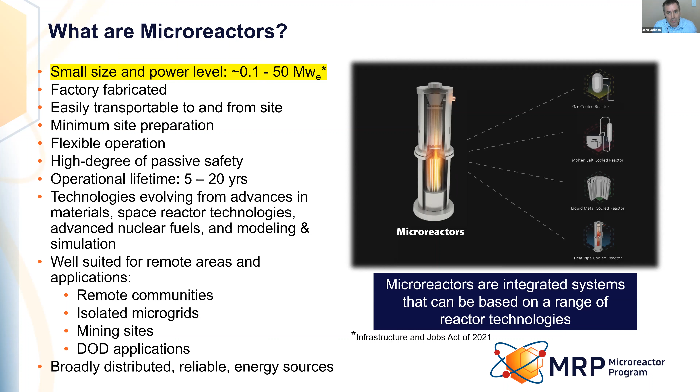So why are microreactors becoming popular? Technologies have advanced quite a bit in terms of materials science, space reactor technologies, advanced nuclear fuels, and modeling and simulation. And it's very widely recognized - there are many studies going on in terms of suitability for remote areas and applications, at least for the first to say tenth of a kind microreactor that gets commercially deployed. So initial target areas are remote communities, isolated microgrids, mining applications, and DoD applications.

So what about the program? The Office of Nuclear Energy's Microreactor Program is a congressionally funded national program. It sits in the Advanced Reactor Development portfolio, along with high temperature gas reactors, fast reactors, and molten salt reactors.

The vision is that through cross-cutting research and development and technology demonstration support, the program will achieve technological breakthroughs for key features of microreactors, and empower initial demonstration of the next advanced reactor in the United States, which many would argue is the Marvel microreactor, which I'll get into in a little bit.

The Marvel microreactor is a very small microreactor being developed by the Microreactor Program, and enables successful demonstration of multiple domestic commercial microreactors.

So the vision is supported by fairly obvious objectives: address critical cross-cutting R&D needs that require the incredible unique capability that exists within the DOE complex, and engineering universities such as University of Wisconsin, where incredible expertise and infrastructure exists as well.

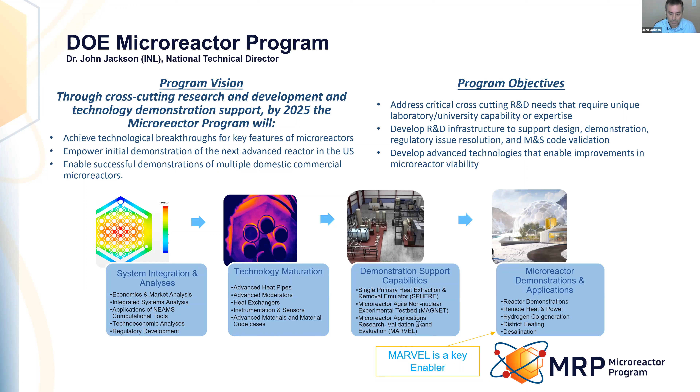So just an example of some recent economic analysis work done by the System Integration and Analysis Technical Focus Area. This is a summary of 3 reports: one by University of Wisconsin that I mentioned earlier, another by University of Alaska Anchorage on siting microreactors in Alaska, which is an extremely popular idea, and then a Microreactor Program supported study by the Nuclear Alternatives Project for feasibility of siting microreactors in Puerto Rico.

This is a 147-page report. I recognize I didn't add the link to the report, but if you search for global market analysis, microreactor market analysis on the OSTI webpage, you'll find it.

We're doing this to understand economic performance and market analysis, to provide a basis for support to industrial microreactor deployment and operation by understanding the market and the drivers.

I don't want to spend a lot of time on this, but one of the things they looked at were deployment indicators cross-referenced with use cases across the top of this table.

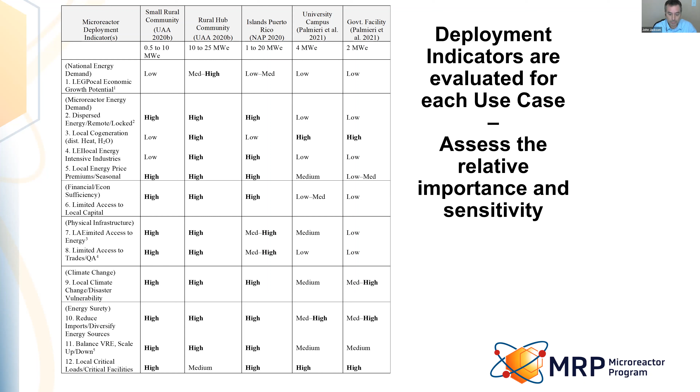The report goes further to suggest microreactor technical requirements to meet indicators requirements. An example is number 2 here, dispersed energy, remote, locked. The technical requirement generally has to do with transportability and self-containment, small EPZ, for example, long life core, and this is typically measured by transportability via an ISO container.

The report goes further to suggest, drawing from the dozen or so domestic microreactor concepts under consideration right now, which ones might match this technical requirement.

This is a slide put together by Holly Trellue, our technical focus area lead for the technology maturation focus area. The intent of this is not really to highlight heat pipe microreactor, but rather as a generalized reactor display, to point out the materials and systems we're interested in primarily from the Microreactor program standpoint.

We haven't spent a ton of time on fuel, except to qualify legacy metallic data for EBR2, for instance. We rely on other programmatic efforts, such as the TRISO program, for a lot of this work.

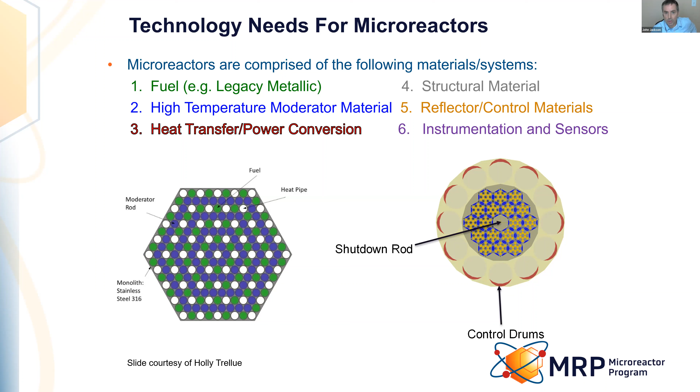By the way, I should toss out a disclaimer. There's some technical detail in these slides. I am not the technical expert in these areas, so I'll do my best to answer any questions you have, but may refer you to technical focus area leads.

In terms of understanding and quantifying effects of yttrium hydride, it is of interest because it generally retains hydrogen at temperatures approaching 800 Celsius, which makes it an ideal candidate for several of the microreactor concepts to drive down the size of the core. So we've set about providing characterization data for yttrium hydride.

For example, in fiscal year 21, Los Alamos at the NCERC facility performed a criticality experiment to understand a slight positive reactivity coefficient as a function of temperature, to provide this data to designers so they can design with this in mind. We've also performed an advanced test reactor irradiation to a single fluence, 2 times 10 to the 21 neutrons per square centimeter, at 3 different temperatures.

John, was there a question that popped up?

Yeah, if you open the chat channel, Ben Rendering is asking: MARVEL is filled with UZRH, which is well qualified up to 650 C or so, and was used in the SNAP program, which is similar to MARVEL, instead of qualifying zirconium hydride and YH moderated and TRISO fuel. So his question is: is UZRH a credible fuel option for commercial microreactors that could reduce some of its qualification burdens?

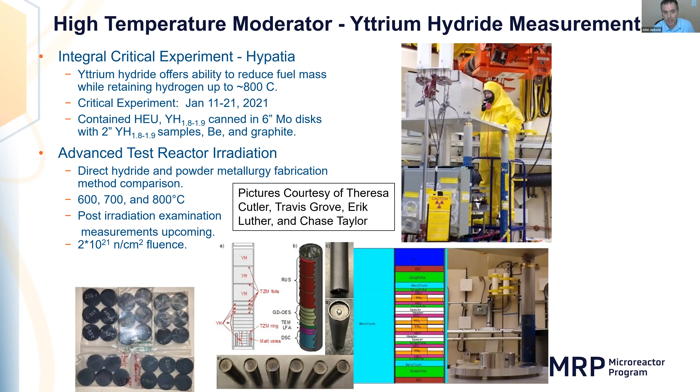So the ATR experiment included 2 different fabrication techniques for yttrium hydride: a direct hydriding technique, as well as a powder metallurgy fabrication technique developed at Los Alamos National Laboratory. Fiscal year 22 will be focused on the post-irradiation examination, including understanding hydrogen migration at 600, 700, and 800 Celsius.

As I mentioned, we're focused on test article development for integration in the magnet facility and sphere facilities. We started with a 7-hole heat pipe test article, attempted advanced additive manufacturing techniques, but couldn't quite get the tolerances we wanted. So we're building a 37-hole, 37 heat pipe test article that you see in the image on the bottom middle, by building blocks and diffusion bonding them together.

The idea behind this test article is to understand interaction of heat pipes, for example, cascading failures, and so on and so forth. The single heat pipe test article is surrounded by cartridge heaters, seen in the upper middle or upper left image, and these allow characterization of heat pipes.

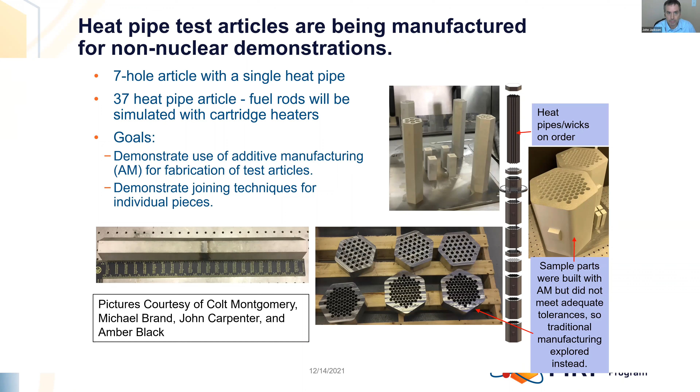Just a few more words about the 37 heat pipe test article. It is under construction right now. The diffusion bonding has begun. It'll have 37 heat pipes installed in it. They still need to have wicks added and filled with sodium. It'll be combined with a heat transfer capability and installed in the magnet facility for testing. It'll include instrumentation and sensors, heavily sensored, and will interface with perhaps power conversion units so we can understand the interface.

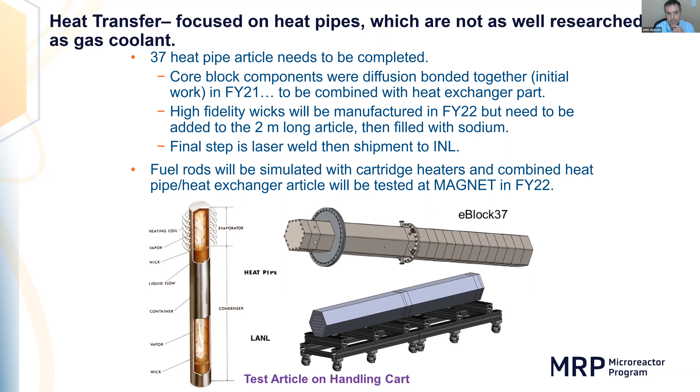So just a few characteristics of the Sphere facility: a single primary heat extraction and removal emulator. It's a single effects test capability built to enable gas flow, for example, for helium component testing. It provides up to 20 kilowatts of power and has a maximum operating temperature of 750 Celsius. This facility came online in 2021, and we performed initial startup and operation, and are completing the engineering design of a gap conductance test article to address an issue the NRC has identified. We're also working with an industrial partner to understand the effects of orientation on heat pipe performance. The Sphere facility is very good for understanding and isolating single effects, for example, transient behavior of heat pipes.

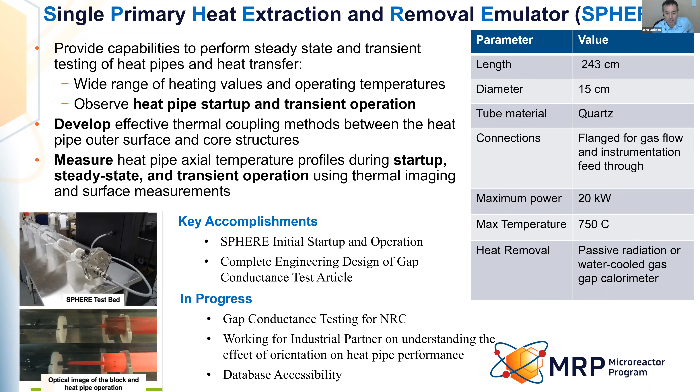Similarly, the Microreactor Agile Non-Nuclear Experimental Test Bed is a non-nuclear microreactor surrogate, if you will. There's a large test space, 5 foot by 5 foot by 10 foot, enabling full-size component testing. It can integrate with a power conversion unit. It enables verification and validation. It enables air or inert gas, with a design pressure of 22 bar and maximum power of 250 kilowatts and 750 Celsius temperature. This is a useful facility for verification and validation of full-size components, integral effects tests, power conversion connection, and so on and so forth.

June, have there been any other questions that have popped up? Yes, we have two questions. One is from Erica Tierman. He's asking what type of wick you are using in the heat pipe.

I'd have to verify that with Holly Trellue, I apologize. Another question is from Mark Anderson, I think it's similar: do you know what type of wicks are being considered for the heat pipe? So who is the contact that could give this information? Holly Trellue, our technical focus area lead, her contact information is in the last slide, would be a great person to ask. Okay, thank you. Sure, oh, so another, apologize.

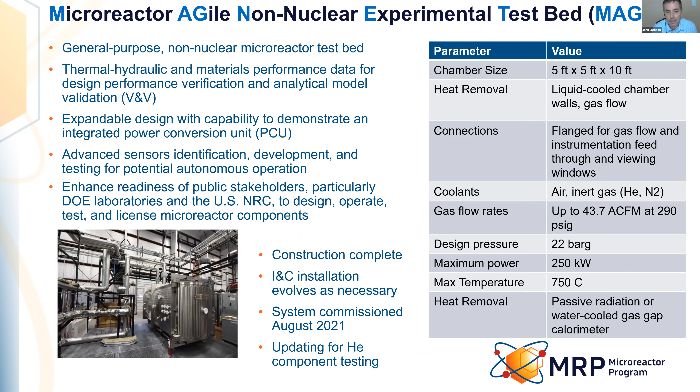Okay, thank you, and we have a fourth question. Sorry for that, yeah, go ahead. Daniel asked about Republicans and Democrats being equally interested in making nuclear generated energy usage, nuclear as a priority.

Yeah, so that's a policy question. I'll point to the bipartisan infrastructure bill as a great sign that people are headed in the right direction. Among other things, the bipartisan infrastructure bill authorizes full funding for the advanced reactor demonstration projects, which, if you're not familiar, are a Natrium sodium fast reactor slated to be installed in Wyoming by 2027, and an XE-100 X-energy concept slated to be installed in Richland, Washington. So those are fully funded, and the bipartisan infrastructure bill has quite a bit of content in it, and nuclear is mentioned some 76 times in there.

Okay, thank you. So we do have in our possession a Brayton cycle Capstone C30 turbine alternator compressor unit that we're going to integrate in the magnet facility if we get appropriate funding this year. This will enable power conversion unit testing and interface with heat exchangers.

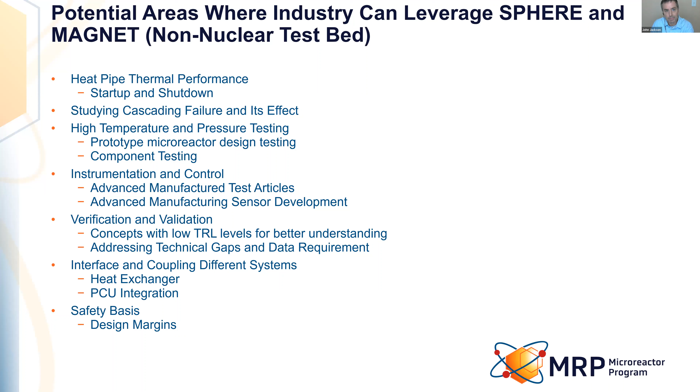Now, some of this is not coming to fruition because we're under continuing resolution. Getting back to the previous question about people getting along with each other, unfortunately we're stuck in continuing resolution for the time being.

So before I get into the Marvel microreactor, are there any other questions? No, we don't. Maybe we can hold questions to the end of the presentation. Sure.

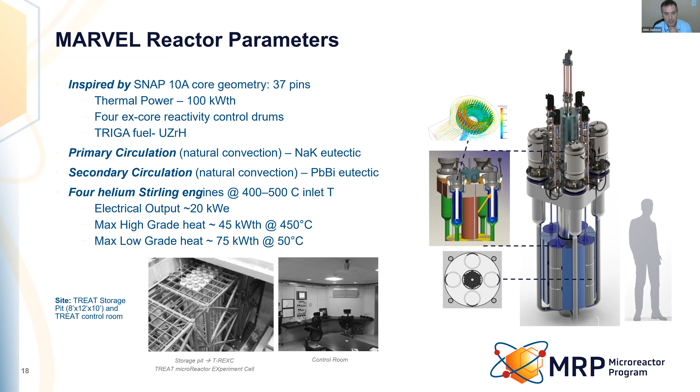The Marvel microreactor is slated to be installed in the Transient Reactor Test facility, in a pit in the floor. It'll operate synergistically with TREAT, in that while TREAT is off, Marvel is on, so it's not expected to affect TREAT operations.

In terms of value from our perspective, many of the targeted communities are new to nuclear, the targeted microreactor entry market. Marvel will help us to answer questions associated with operational complexity.

It'll allow us to take real data to address fears of co-location, and help us understand training needs and reliability of a microreactor. The bottom line is it's a major barrier to market entry that we don't have anything besides a paper reactor right now in terms of microreactor technology, because people are reluctant to adopt a technology unless they can see it in operation. So Marvel will be the first to achieve criticality and power end-user applications, enabling us to answer some of these questions.

From a developer perspective, we have spoken with several developers. There are technology interests such as the uranium zirconium hydride fuel implementation, and the reactivity control system is very popular, as is our process to address NEPA requirements, fuel loading processes, and the power conversion system. I've got a quote here in the middle of this slide.

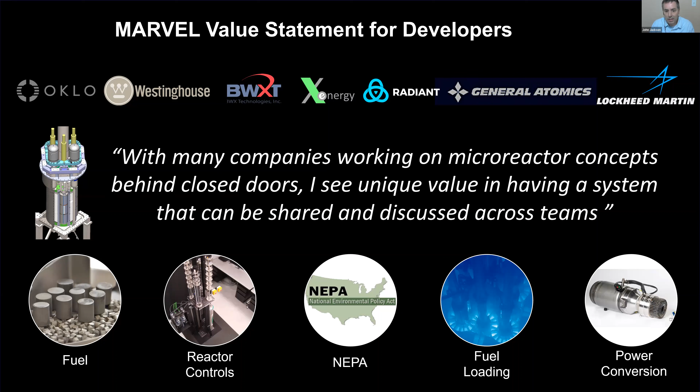With respect to DOE, it's important to remember a little bit of history, that the US government enabled the light water reactor commercial sector, not the other way around. There were 52 reactors demonstrated at INL in the 25-year period between 1950 and 75, which helped pave the pathway for Navy nuclear and commercial water-based reactors. No new advanced reactors have been built since the Department of Energy was formed in 1977.

So MARVEL is a DOE reactor, and it has an opportunity to be the first in several ways: the first to create a new market, the first since the formation of DOE, and the first to connect to a nuclear microgrid in the world. This is no doubt about reestablishing US leadership in nuclear.

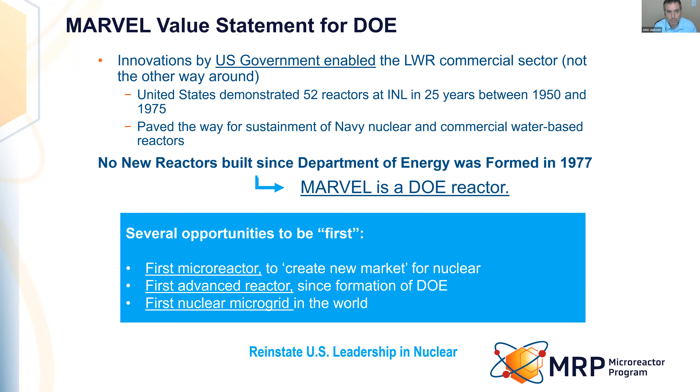Application spaces of interest: MARVEL will be connected to a very small microgrid. We've reached out to several end user application companies who have shown an interest in connecting applications to the MARVEL microreactor once it's operational. Examples include a containerized data center from Dell, a remote water purification system, and so on and so forth.

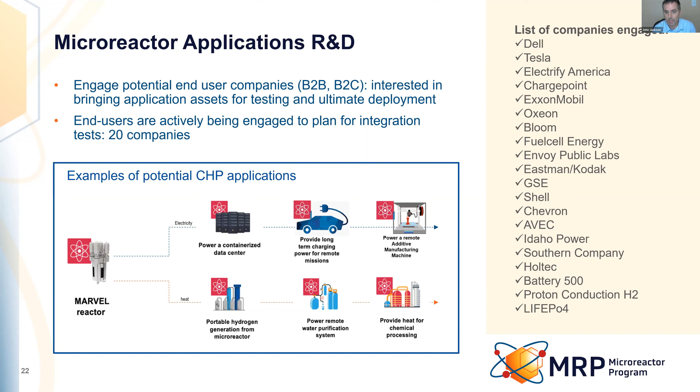This is not currently part of the work scope. Our work scope currently stops at criticality, but it will be handled by the Integrated Energy Systems Program, the application integration.

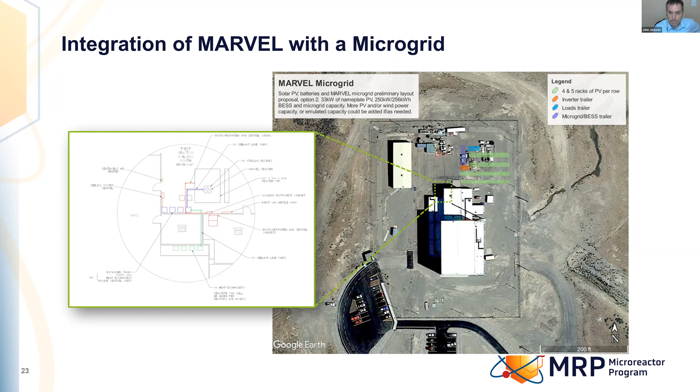I mentioned the NEPA process. The MARVEL microreactor was the first new reactor to complete an environmental assessment, which drastically reduces the time and cost of a DOE authorization. The National Reactor Innovation Center submitted a legal white paper to justify the basis for the environmental assessment.

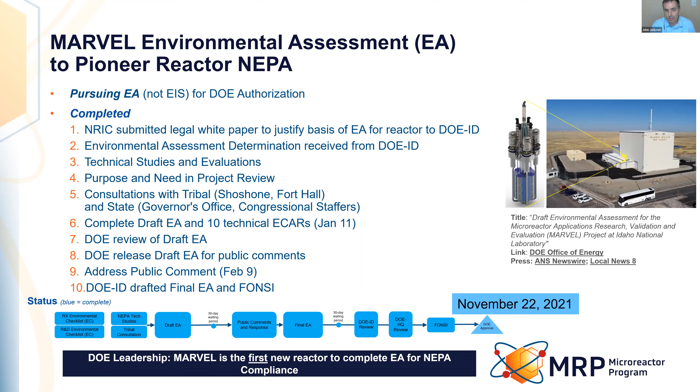We did this starting in approximately January of 2021 and finishing in November of 2021, and there was some loss of efficiency in there, so it could realistically be done sooner. Bear in mind this is a non-commercial demonstration, so there is some reason to believe this pathway was paved for that reason. But this will help pave the way for commercial demonstrations as well—a well-characterized site where demonstrations can occur.

In terms of design and testing updates, where are we? You can see in the lower part of this slide, blue means complete. We just had our interim design review. In fact, Professor Cordini participated in the interim design review last week. We'll address the interim design review findings, move on to final design, and begin long lead procurements hopefully very soon.

PCAT, the primary coolant apparatus test, I'll talk about. It's an integral effects test system, a non-nuclear copy, replica of MARVEL. We've built control systems, understand the behavior of the reactivity control system, and tested the power conversion system with Stirling engines.

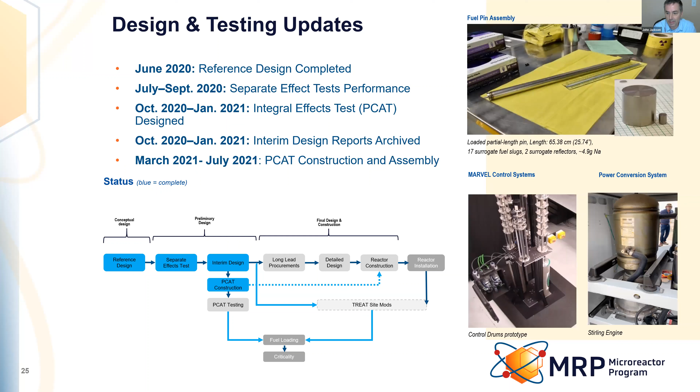This is an example of a risk reduction test. The Stirling engines had not been used this way, as an interface with lead bismuth eutectic. There were concerns over vibration, as this is a piston-driven system. So we performed a simple experiment rather than doing a bunch of modeling and simulation.

You see lead bismuth eutectic blocks in the upper left-hand corner of this image. They were melted. Data was extracted from the Stirling engine, which operated by dipping it into the lead bismuth eutectic pool. We verified the vibration parameters, verified that electric power could be obtained in the 4 to 5 kilowatts per engine range, and also found a benefit for circulating convection from the vibration. A very important risk reduction test to understand whether Stirling engines would work in this capacity.

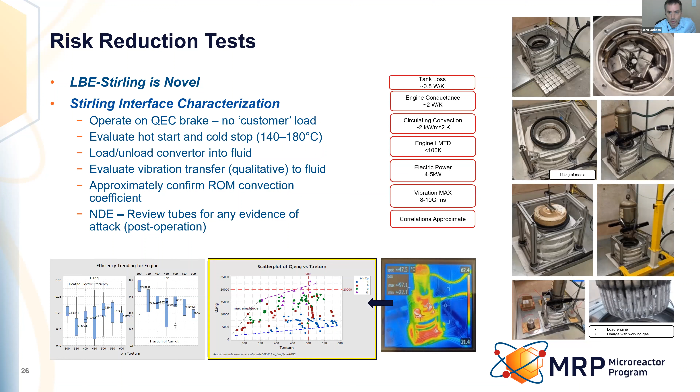The primary coolant apparatus test is a full-scale test article representing MARVEL. It's essentially MARVEL without the nuclear core. This project was pulled off in 9 months. You see an image of the primary coolant apparatus test with the Stirling engine interface up front.

It is an integral effects test that will help us verify and validate the natural circulation system and the modeling and simulation parameters. It will also help with training operators, and perhaps most importantly, in building this to ASME standards, we now know how to build the MARVEL microreactor from a construction standpoint.

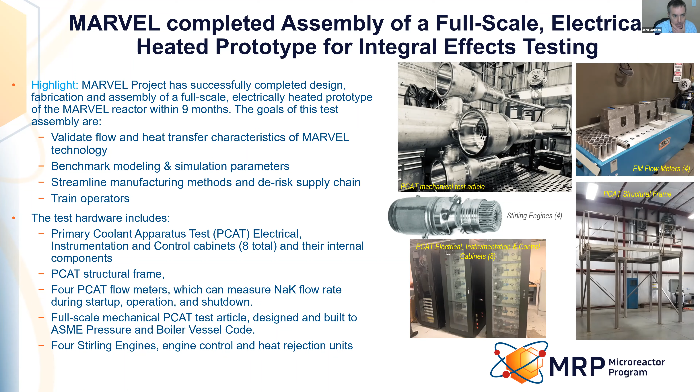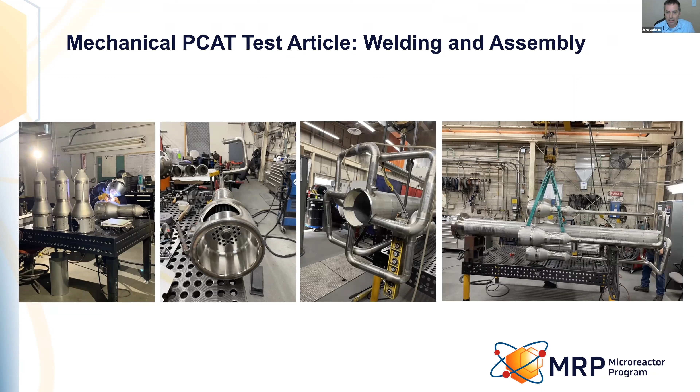These are some more images showing the primary coolant apparatus test under construction, done at the Materials and Fuels Complex at Idaho National Laboratory's fabrication shop, from design to final construction in less than 9 months. Quite a feat pulled off by the team.

There are 8 control cabinets. The primary coolant apparatus test shown is what it'll look like installed at Creative Engineers Incorporated, a partner facility in Pennsylvania. 8 control cabinets, heavily instrumented, because we'll be taking lots of data on performance of this system.

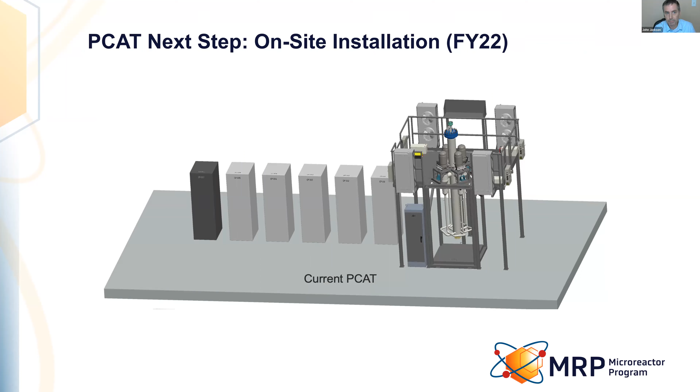With respect to fuel, during the initial parts of the project, we thought we'd take a run at fabricating uranium hydride fuel using the powder metallurgy technique demonstrated by Los Alamos National Laboratory to fabricate yttrium hydride. I should stress that the MARVEL project is not a fuel R&D program. So we walked down the path a little ways, made some progress. You see some of the issues we faced with cracking, for instance.

A decision was made to procure fully from Triga International, the producer of Triga fuel. Unfortunate because this was seen as a de-risking, perhaps, in case something goes wrong with, for example, the Triga International fuel production line. But in the end, we'll reassess as the year goes by.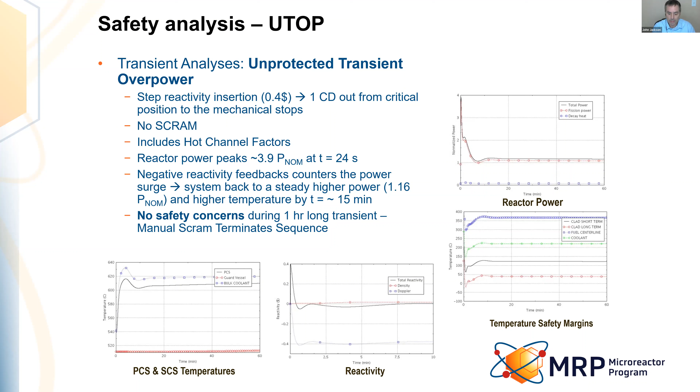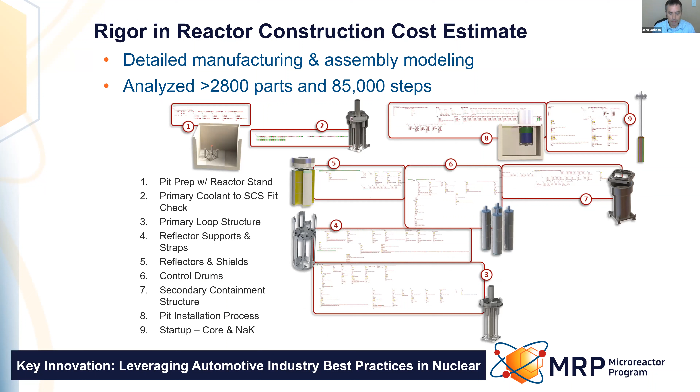In terms of innovation, we reached out to the automotive industry, Munro and Associates, to get an idea of discrete costs for processes and parts. This is not representative of the cost with the fuel, but this gives us an opportunity to understand, when we reach out to vendors, what the cost should be for various components of Marvel.

So you see the total manufacturing cost is expected to be around 4.7 million in the pink row on the Marvel reactor without fuel. Fuel happens to be a very large cost driver.

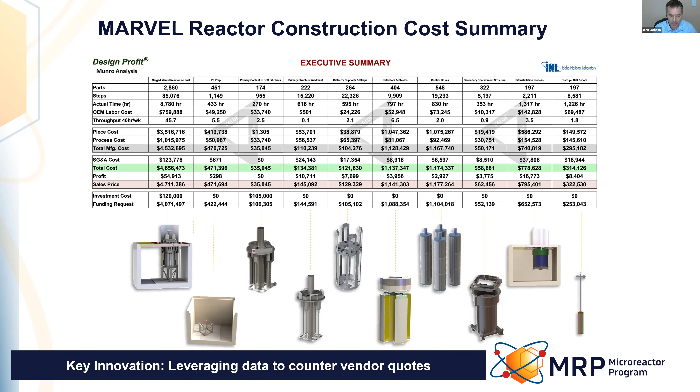Key project challenges: fuel R&D may not achieve formulated specifications. This shouldn't be an issue with procuring from Triga International. However, we do have schedule concerns. Triga International has a lot of demand since it's just coming back online, so this represents a potential external supplier limitation.

Funding availability is also an ongoing challenge, as we're a DOE program funded year to year, and things like being stuck in continuing resolution are a real problem for us. Lack of precedence makes it a challenge for project cost estimation, for instance, and time. But it's very important to pave the way.

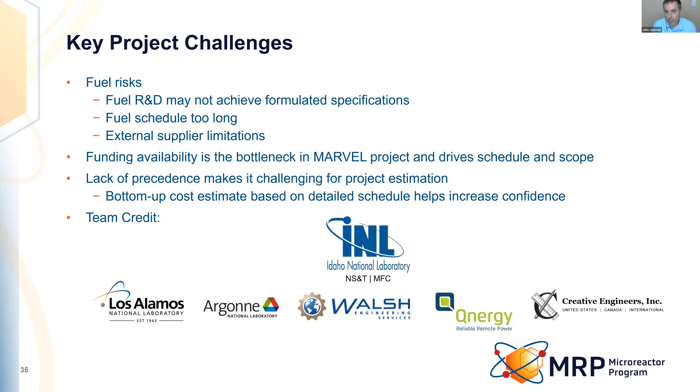This is a team effort led by Idaho National Laboratory, but with key contributions from Los Alamos, Argonne, Walsh Engineering, Qnergy, which is the supplier for the Stirling engines, and Creative Engineers, who will perform the primary coolant apparatus testing.

So far, major accomplishments: completed conceptual and interim design reports to support the interim design review, 7 separate effects tests to increase technology readiness levels, completed design, fabrication, and assembly of full-scale electrically heated test system, the primary coolant apparatus test. All the NEPA steps are complete. As of November 22nd, we received the finding of no significant impact from DOE.

In calendar year 2022, we'll be looking at site preparation, fuel procurement, reactor construction, and the preliminary safety analysis and final safety analysis. We expect criticality near the end of calendar year 2023 if everything goes right, so that Marvel will come online in the first quarter of fiscal year 24.

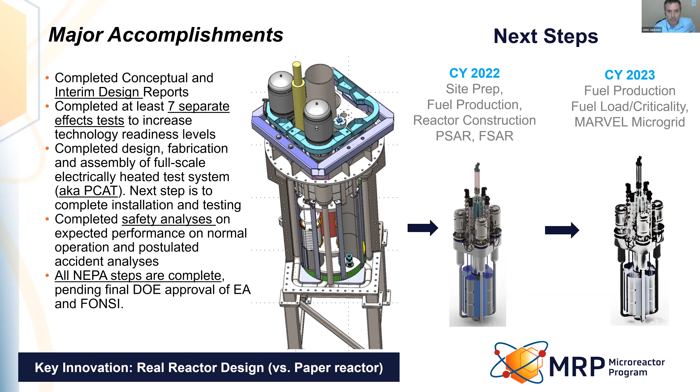And the key innovation here is that this is a real reactor versus a paper reactor. Just to throw out a timeline to get a sense of where we're headed and where we are: Marvel is envisioned to come online in late 2023. The Pele reactor project, the DoD projects, are 23-24. The dome test bed from NRIC enables the DoD program.

Some of the other concepts are more in the SMR space. The Lotus test bed, by the way, is a demonstration facility for commercial microreactors. You see the ARDP awardees: the Natrium Reactor, the consortium between TerraPower and General Electric, slated for 2028; the Xe-100 for X-energy, the other ARDP awardee, in 2027; and the NuScale small modular reactor coming online in 2029.

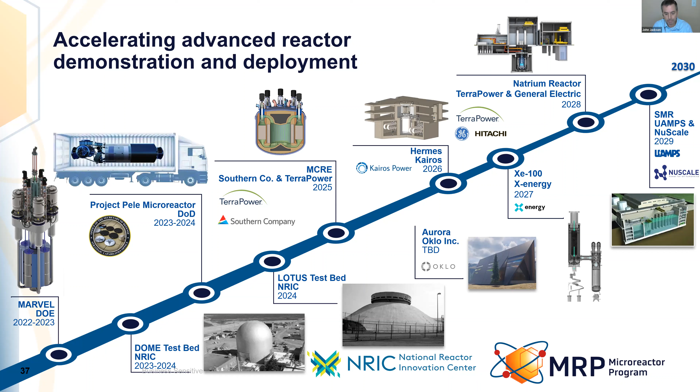This is Yasir Arafat, our technical lead for the Marvel Microreactor project. Feel free to reach out to him with questions, or me.

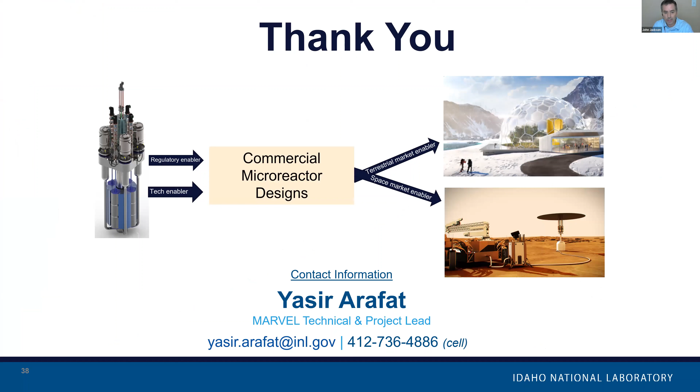Hi John, this is Paul Wilson. Can you hear me? Yeah. Hey Paul, how you doing?

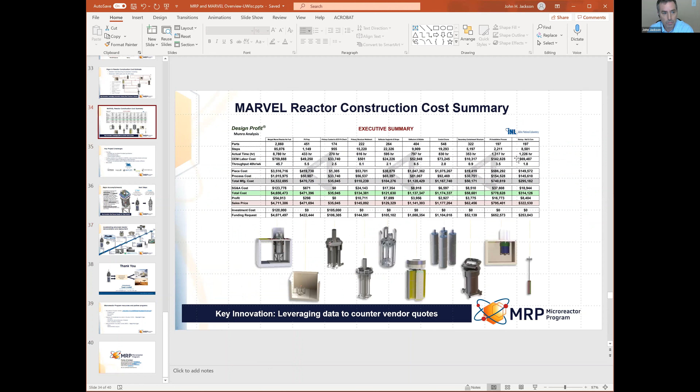Great. I'm curious to get the high level perspective on Marvel versus commercial development. You made a good point somewhere back there, a slide that talked about how it's important to have something that's a little more open that people can talk about. But what are the things that are relaxed about Marvel? For example, it's not trying to be commercially viable, it's not trying to be NRC licensed. Is the fact that you can do it so quickly due to some of those things? Are there other high level things that distinguish Marvel from one of these private designs, other than the fact that we can talk about it?

Yeah, so one of the big ones that jumps out, Paul, and thanks for the great question, is that we're paying for it, and Marvel is very small for one thing. 100 kilowatts thermal. You could conceptualize that it could at 20 kilowatts electric maybe power part of a city block. What I'm getting at is the economics of Marvel don't really make sense, so that's one of the areas where we're relaxed. I'm not sure a Stirling engine would make the most sense for a commercial concept at about 20% efficiency.

So that's one primary example. I'm not sure the uranium hydride is the most economical fuel, so economics play a relaxed role. I'm being careful in saying that because I don't want to give the impression we're spending oodles of money for something that'll be a paperweight. But the key to Marvel is really it's going to be a fire starter. It's going to address that fundamental question we often hear, and that is, when can I see one? So at a very high level, those are the reasons for Marvel.

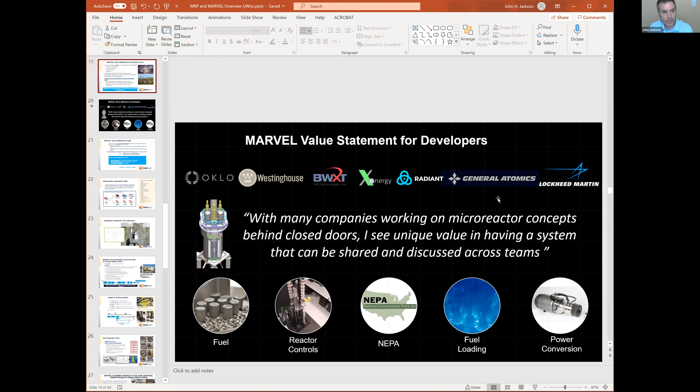Yeah, so the MAGNET facility, I'll see if I can find the slide real quickly. The MAGNET facility is a perfect example of expansion of capability to accommodate other concepts. As I suggested, I'm getting a low audio quality warning, but can you still hear me? Yeah, I can hear you, John. So the MAGNET facility is undergoing an evolutionary change to allow helium component testing with an eye toward gas-cooled reactor concepts. One of the reasons we pay attention to heat pipes is there's very little data on heat pipes available, so it's more or less low-hanging fruit.

And there's been a lot of R&D on high-temperature gas through the years. In fact, that was part of the NGNP program. That's not to say we don't support it, of course we support it. The MAGNET facility is a major microreactor analog that supports, for example, high temperature gas concepts, and could also accommodate small molten salt loops for component testing for molten salt concepts.

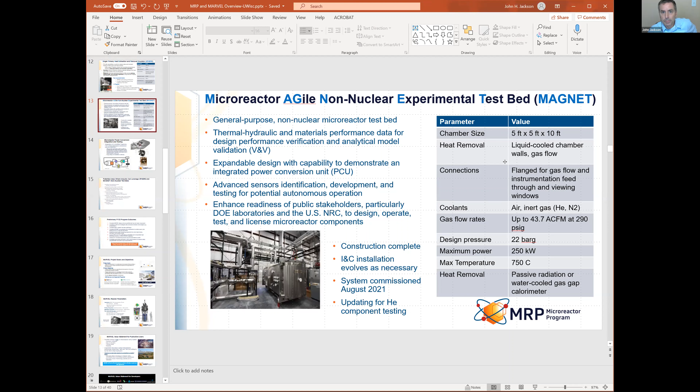Thank you, John. Okay, yeah, let's thank Dr. Jackson again for this very impressive presentation. Thanks a lot for everybody's attention, and I hope everyone has a good rest of their day. Thank you, thank you, I appreciate it. Yeah, thanks, John.